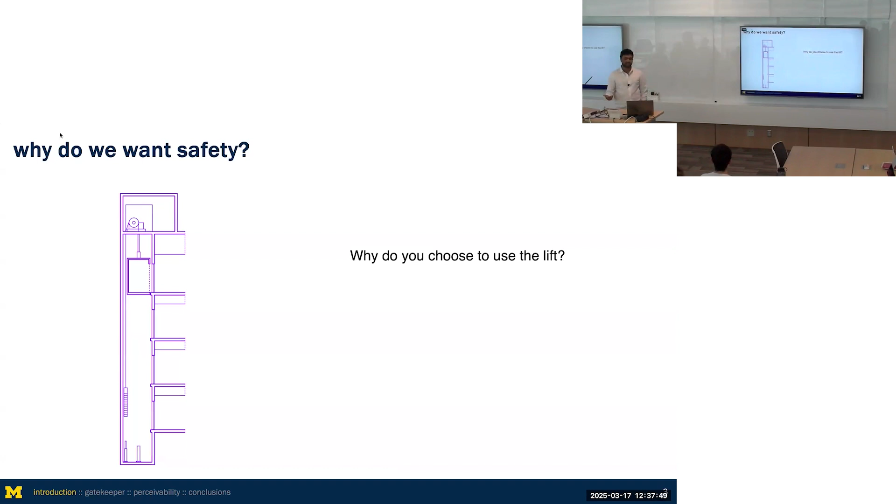But once the lift was invented in its modern form, people started moving up, away from the roads, away from the pollution. And this really was an enabling factor around the 1850s. What happened? Elisha Otis, which you might recognize from Otis elevators, was the one who first created the safety mechanism for an elevator.

He basically created a leaf spring that was mounted inside the lift, where if the main cable snapped, the leaf spring would expand and grab onto the side walls of the shaft and make sure you only fall a couple feet and not actually fall all the way down to the bottom of the shaft.

And so he demonstrated this by very famously being at the World's Fair in New York, where he got on his elevator, he cut off the rope to his own lift, and he stopped. And I think that captured people's imagination.

And I think what really inspires me about this story is he sort of built the safety mechanism into the product. The safety mechanism was built into it to the point where people could start to use it and really appreciate how to be able to trust someone and trust Elisha Otis, I guess, on being able to use the lift. The question is, how does this extend to modern autonomy systems?

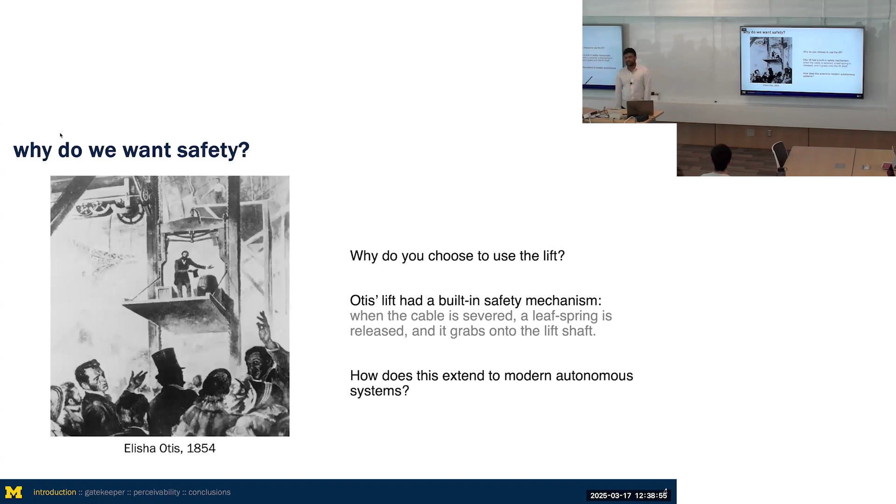In modern autonomy systems, we can't just do mechanical things. We can't just build a parachute into the side of the helicopter and prevent it from falling or crashing. You need to be a little bit smarter about this. And so that's what motivates a lot of my research. What are the safety guarantees that we really want? I'm going to motivate this through two really simple examples.

The first is subterranean navigation. You have this drone that's operating in a dark, dusty environment. It's trying to go through many obstacles. How do you get it to go from point A to point B without crashing into things? Even if it's teleoperated, there's delay and there's lag in how you communicate with the robot. You want some level of autonomy or safety critical aspects built into the robot.

The second example is called a Firewatch mission, and I'm going to keep coming back to this one. It's a really common firefighting mission. Essentially, the problem is that firefighters don't know where the fire is in a wildfire firefighting scenario. You can get satellite imagery at some update rate. It's usually not very high resolution, and it's usually not real time enough.

So what they do is they tell a helicopter pilot, go fly along the perimeter of the fire, as close to the fire as you can go, and we'll use the GPS trace to be able to figure out where the fire is. And then the firefighters figure out where they want to allocate resources. So the question is, how do we design an algorithm to replace the human in this case? Perhaps if you wanted to be able to fly this without sending the human literally into the line of fire.

So what kind of guarantees do we want? Ultimately, we want to ensure safety. In the first example, that's like obstacle avoidance. In the second example, that's making sure the helicopter doesn't enter the fire. And you have other standard constraints. You want to respect the dynamics of your vehicle. You want to respect input constraints.

You also want to make sure you finish the mission. It's a very easy way to stay safe: just stay at home, don't go anywhere, don't do anything. But that's not the kind of safety that we want. And you also want to be robust to disturbances and uncertainties. These are going to be a core part of any robotic system that you implement. We need to understand how these factor into your system.

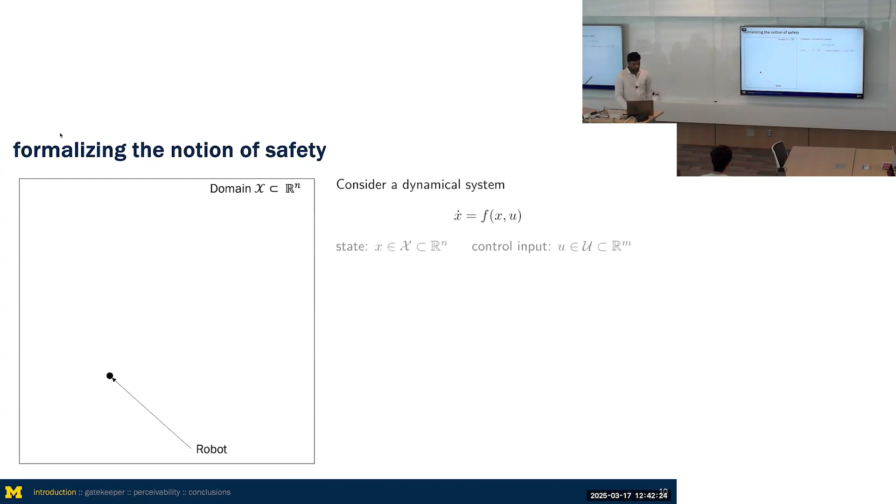Let's talk a little bit about what these safety requirements usually look like. Formalizing the notion of safety a little bit, I think about it as a dynamical system, x dot equals f of x, u, where x is your state and u is your control input. And you have a robot that operates in some sort of environment. The environment has some constraints. And so when I say safety, I really mean a set constraint problem.

You're trying to guarantee some constraints are satisfied. Things like avoid the wall, stay out of the fire. These all form a safe set S. So S throughout this presentation is going to denote the set of states that you're allowed to be in at any given time. And so the goal is to ensure that you stay inside this set S.

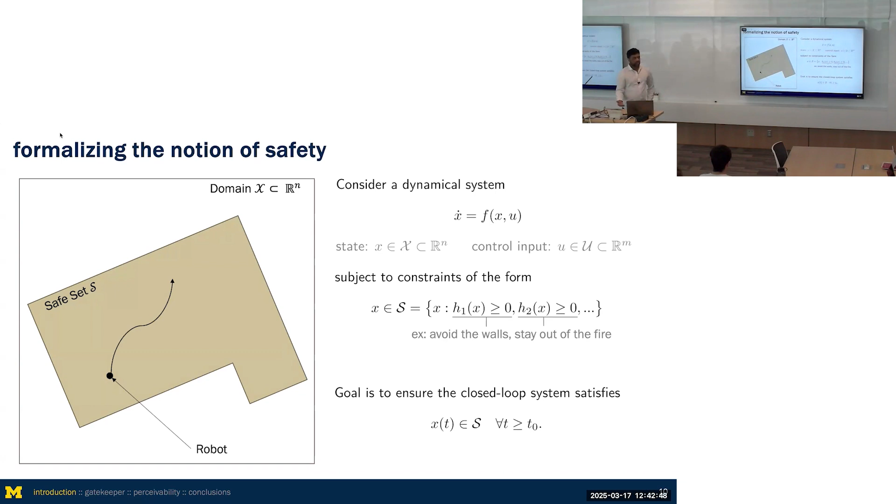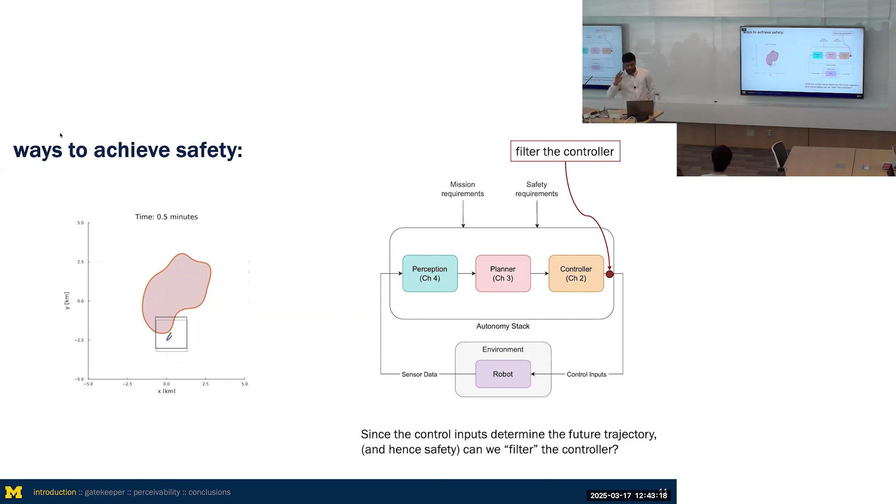How do people normally achieve this safety? I think it comes down to a few different ideas, but one that has really taken hold of the research community in the last 10 years in particular has been to think about it as something that you apply at the very end of your autonomy stack. If the only thing that determines the robot's trajectory into the future is your control inputs, what if we just filtered the control inputs at the very end and made sure we never sent bad control inputs to the robot? So that essentially is the idea of safety filtering the controller. A lot of you probably recognize that this is the idea of control barrier functions.

Control barrier functions were introduced by Professor Ames, where he considers this control affine dynamical system. And he says, well, we have a whole lot of constraints, but let's say we can find a function h. This function h is kind of like a magic function: it takes in your state and returns a single number. If it's positive, we consider it safe. If it's negative, we consider it unsafe. And so it defines the set C that's a subset of your safe set.

And what Ames says is, if h is a CBF, and I won't go into the technical definitions here, then he can define a controller, which we call pi CBF, that ensures that if you started within C, you'd be able to stay inside C forever in time. And so if you can guarantee that h is a CBF, then you have all of these nice properties where you can guarantee safety.

We've worked a lot in our lab on control barrier functions, and a lot of people around the world have also worked on these. But the fundamental problem seems to be that finding a CBF is hard. It's computationally difficult if you want to try numerical methods. It's analytically often quite difficult because your robot dynamics are not so easy to work with. And so it becomes difficult to find a CBF.

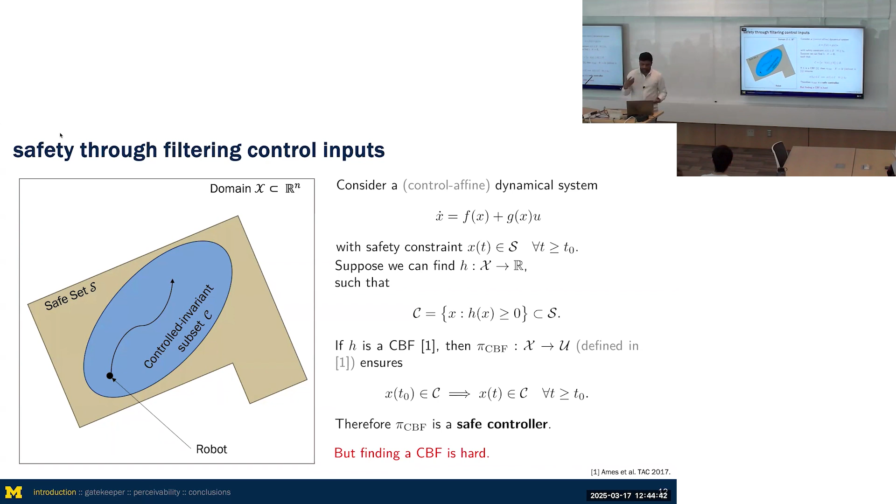The benefit, of course, is that you can handle nonlinear systems as long as they're control affine. And so while you do get the benefit of the nonlinearity and the handling of these constraints, you still need to find a CBF. So that was sort of the first idea, filter the control inputs.

Since the dawn of robotics, perhaps, the way that people have started to think about this is, can we constrain the planner? We want to maintain constraints. What if we put these constraints into the planner itself and made sure trajectories were safe? And so what does this look like? There are many, many methods for doing this. I'm going to highlight two broad classes of them.

The first is path planning methods, where you use simplified dynamic models, usually kinematic models or single integrator, double integrator type models, and you plan trajectories that respect all your constraints. Obstacle avoidance and dynamic obstacles can be handled, and sometimes Dubins vehicle type systems can be handled.

And so you can handle a lot of complex and sometimes dynamic environments. But the problem is that you've got the difference in the model. You've got a model that you use for the planning, and you've got a model that your actual robot is. And in between, there's a controller that somehow should handle all of the mismatch.

Some people have studied this problem, but it's usually quite tricky to take the trajectories that are planned by a path planner and actually put them on your robot as a control input. We did some work on this, trying to see how you can merge that gap a little bit, but it means that you need a lot of assumptions on exactly how these components are built together.

Another common approach is model predictive control and all of its variants. Essentially here, you use the full nonlinear dynamics, or in some cases a simplified model again, and you plan a short horizon into the future. By planning a short horizon into the future, you can really think about what the robot's going to do over the coming horizon, and you can choose to act on the first little part of it and then replan at the next time step.

This is really nice because you can really think about all your constraints, and you can enforce your constraints in your path planners explicitly. But one of the main challenges on a theoretical level is guaranteeing recursive feasibility and stability. These are two really important concepts that I did not appreciate until we ran our controller.

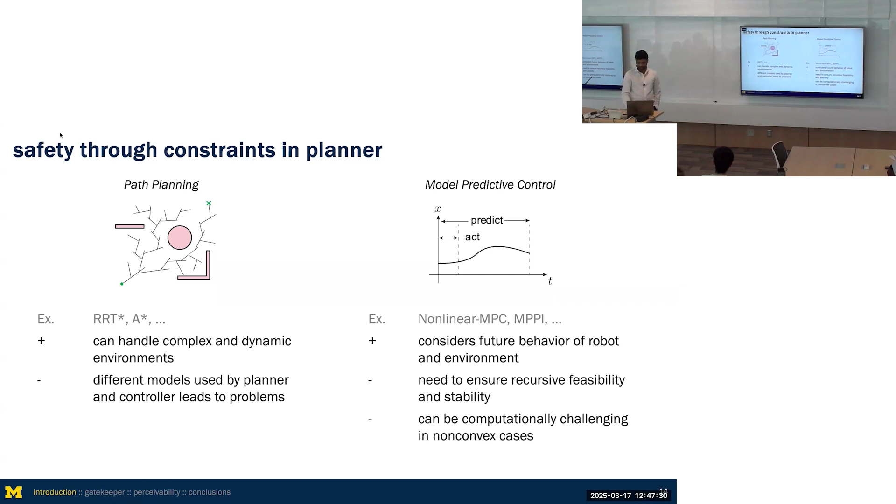The other challenge with model predictive control is that it can sometimes be computationally challenging, especially if you have a non-convex problem, especially if you have dynamic environments. It can be really difficult to guarantee that your controllers solve within a fixed amount of time that's necessary to run this in real time. So these were broadly the two types of methods that people have tried for guaranteeing safety.

And what we're going to try and do is, I was thinking about the firefighting mission, and I heard about this from an actual helicopter pilot who flies this mission. How do humans achieve this? There's some way that humans achieve this. And as I was talking to him, the main thing that he kept thinking about was contingencies, fail-safes, and backups. Essentially, as you're flying through the mission, can you recover safely? Can I go back to the landing pad? Can I do something to escape anything bad that's going to be happening?

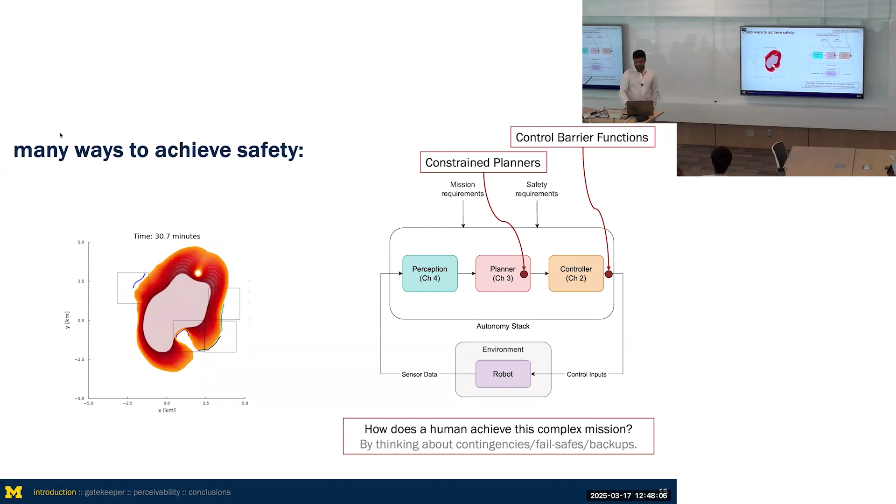So the main perspective shift is, instead of trying to design a controller and a control invariant set and check all your conditions over all of C, what if we just checked that there was a safe trajectory going into the future? You just need to check that there exists a way for you to be safe into the future. And this is the main idea that Gatekeeper tries to build on. Also, we want to do this without compromising on mission objectives.

So now I'm going to try and describe to you a little bit about how Gatekeeper works. The core idea is that you have some sort of safe set that you don't really know a priori because it's unknown. And you have a perceived safe set, which is the set of states that you can see with your robot at the current time. That's going to be denoted by B0. All of this can be time varying, but on the graphics, it's more or less going to be static just to make it easier to understand.

And this committed trajectory, I'm going to guarantee it's safe by construction, and that's the only thing the controller will ever see. So the controller only ever sees safe trajectories to follow. How does this work? At the kth iteration, we're going to construct a candidate trajectory using the path planner's nominal trajectory. We're going to check if the candidate is valid. If it is, we're going to commit it. And the controller is always going to track the last committed trajectory.

Now, you want to be able to guarantee this for all time into the future, right? You want it for all t greater than tk. Of course, we can't plan infinite horizons. We can't compute infinite horizons. So what I'm going to do is split it into a finite horizon and an infinite horizon. The first half is between tk to tkb, and the second half is tkb onwards. And a way to guarantee this is you check that the first half lies within your perceived safe set, and your second half enters something called the controlled invariant set.

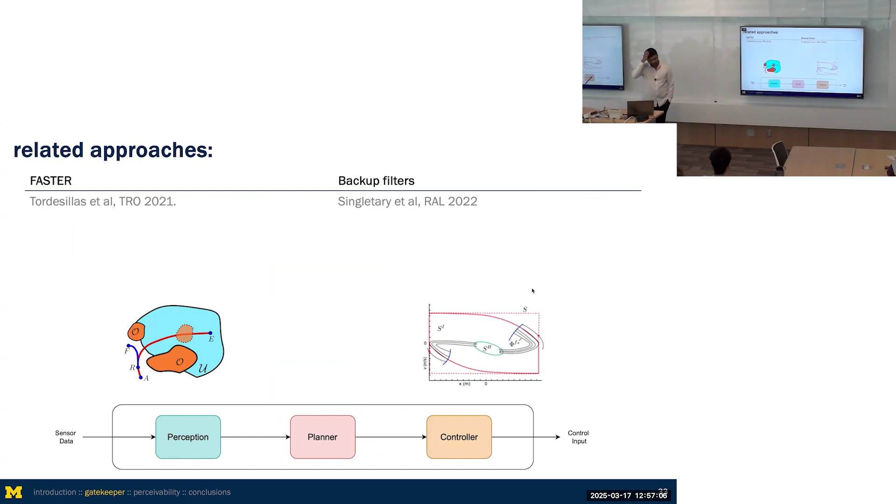Essentially what he does is he uses MPC to simultaneously plan for both the nominal trajectory and the backup trajectory. So here he has a robot that starts at A, it's trying to get to E, but this blue region is unknown. We don't actually know what the safety is there. And so what it does is it plans both the red trajectory and the blue trajectory simultaneously.

One of the challenges is that because he's using MPC, because he wanted formal guarantees, he assumed linear dynamics, he assumed convex safe sets, or at least unions of convex safe sets, and it was necessary to be able to guarantee the recursive feasibility.

Another really cool idea comes from Andrew Singletary from Professor Ames' group. This is much closer to the idea of filtering at the controller level. Essentially what he does is he forward propagates just the backup controller along a trajectory, looks at how close that backup gets to the unsafe set, and if it's getting close to becoming unsafe, he switches his controller towards using the backup.

He has this mixing controller where he mixes the nominal controller and the backup controller. And in that way, he's able to create a continuous time guarantee of safety, where Gatekeeper does it in discrete increments. The whole idea of the safety and backup filters is in continuous time. It's a really cool idea, and it works pretty well for a lot of scenarios.

But one of its main limitations is that it only checks the safety of the backup trajectory, right? If your nominal was a safe thing to do, but your backup is one that's about to collide, why do we switch to the backup? We should keep trying to use the nominal. And that was one thing that motivated the construction of Gatekeeper.

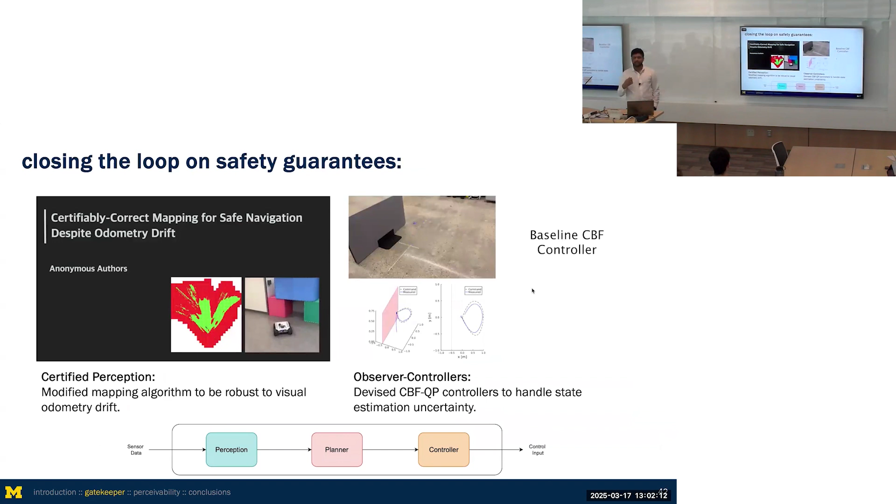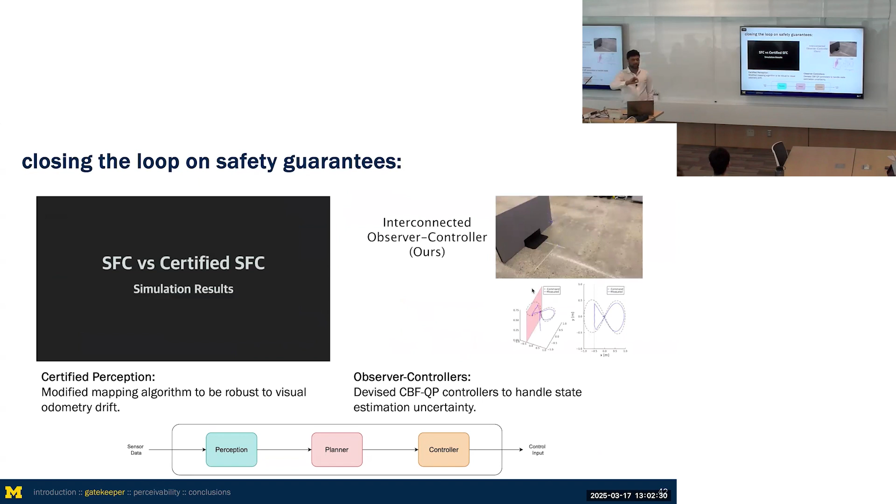Also, one of the main things that I've assumed is that you have a perceived safe set. And for the purposes of the experiment that you just saw, I assumed the perceived safe set was sort of perfect. But no perception system is going to be perfect. And so one of the things that I've been really interested in is how do we integrate the perception part with the planner and the controller such that these guarantees hold across your entire autonomy stack, right? If your perception system is not working correctly, it wouldn't be able to guarantee safety.

And so the first piece of work over here is on what I'm calling certified perception. Essentially, you've got visual odometry drift when you're doing state estimation. That means your maps are kind of corrupted, and therefore you won't be able to guarantee safety. And so how do we modify the mapping algorithms that exist so that we can guarantee safety in the sense of any trajectory that is executed will actually lie within the safe set?

And so the idea that we proposed was, instead of constructing safe sets that are just unions of all the free space that you've seen so far, you can also deflate those regions based on how much visual odometry error you've accumulated. And here we've really used a lot of the Lie algebras and Lie group theory to be able to understand how much error is accumulated per step, and how do we create safe maps in the body fixed frame.

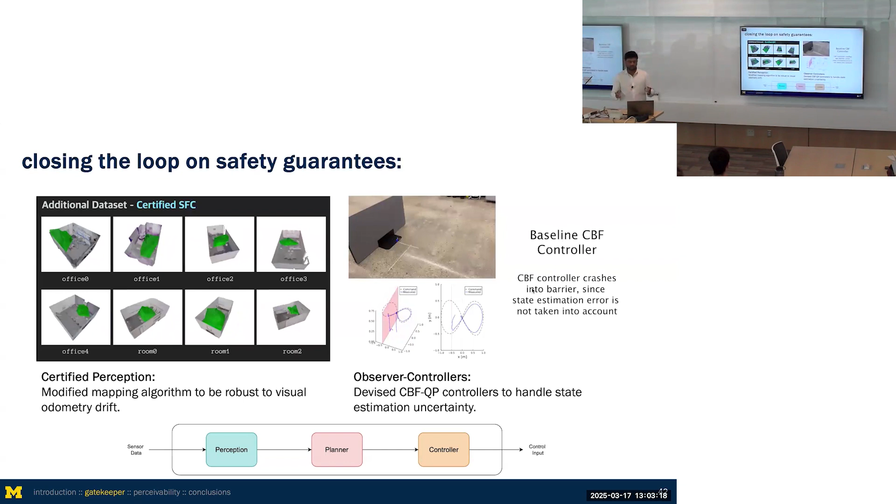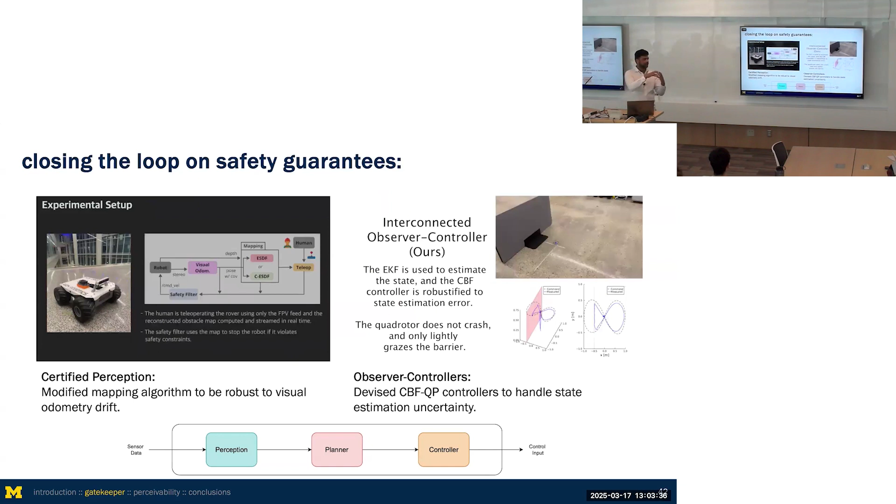The second work, which I think the video is playing, is this idea on observer controllers. So again, you've got state estimation error, especially from like a Kalman filter or any sort of EKF. That state estimation error means you don't really know what the state of the robot is. It lies within some sort of ellipsoid, but you don't really know what the state is. So how do you guarantee controllers working well in that state? And so this work was really trying to understand how do we correct our controllers under this state estimation uncertainty.

All right, so that sort of wraps up a lot of the safety considerations that I've been talking about. We're really interested in how these safety guarantees propagate throughout the entire system and not just either the controller or the planner. And I think you really need to think about all of these components together when you're designing controllers to be able to guarantee safety.

I'm going to switch gears now towards talking about information and what are the limits of information gathering capabilities of robots. So here the scenario is, sort of, I mean, the Mars helicopter didn't really do any sort of exploration, but here are the two main motivating examples for this line of work.

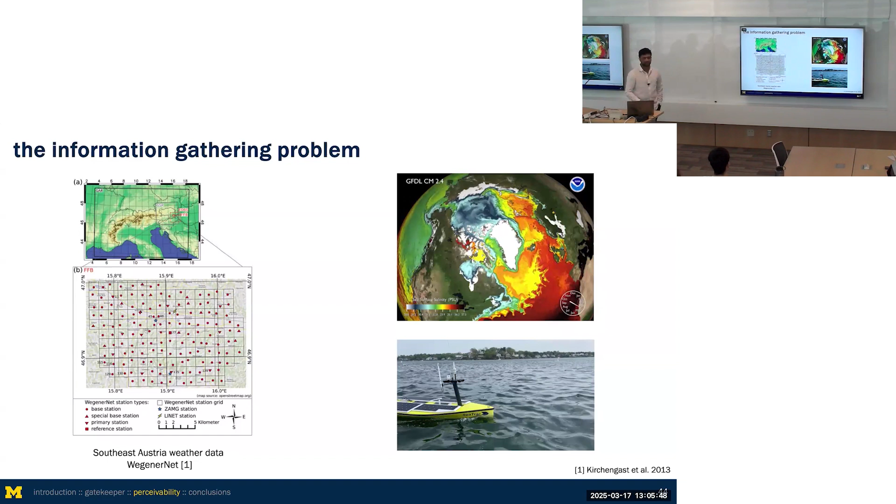So the problem, in words, is we have a team of robots exploring this environment, and they're trying to collect information, right? How do we control these robots to do this efficiently? And when we started to think about this problem, we ran into a lot of problems very, very quickly. The first is, what does efficiently mean? We need a metric for efficiency here. And then we were like, but what does information mean? And then we struggled to try and define how do we talk about the quality of information that we're collecting.

And then we struggled even more because we were wondering, can the robots even collect this information? The information is changing in space and time. You've got the entire world that you want to try and map, but you only have 3 robots. Is it even possible for these robots to go out there and collect the information that you want? And so that led us to what are the fundamental limits of information gathering.

And so I tried to simplify the problem, tried to remove all of the complexity of mountains and wind. And I thought about a single robot that has some sensing range, and we care about a single point P. The single point P might have some information associated with it. For instance, the wind speed, the temperature, whatever you want. It's some sort of vector. I'm going to denote that vector with M. So our goal is to use the robot X to be able to estimate M, right?

And the simplest model I could think of was we have some sort of dynamical system for our robot. Here it's still nonlinear. And we've got a very, very simple model for the M. It's changing in time, so we said M dot equals some noise vector W. We had a linear sensing model. Notice how the sensor measurements Y are C of X times M, so it's linear in M, and there's some noise V added to it.

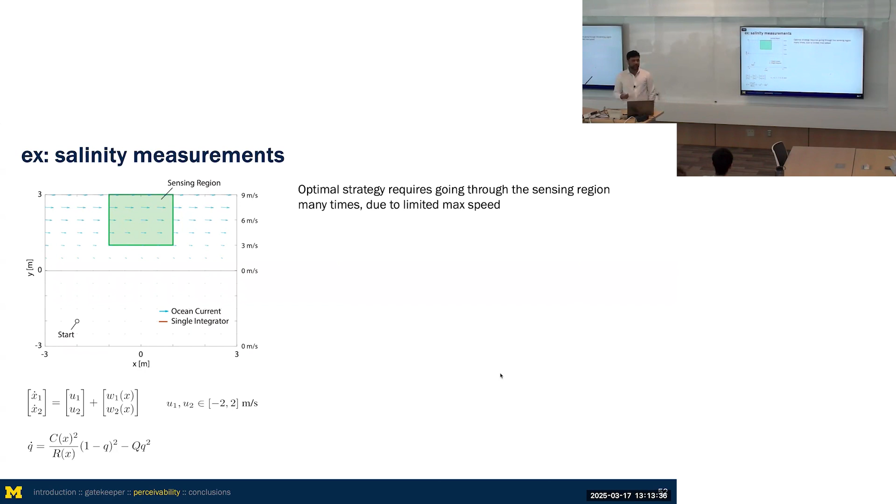You can actually run the controller, and what you'll see is this robot starts out over here, moves up, and it has to do these like circles of this environment. The region over here where it's sensing has too much of a current to be able to stay inside that region and collect measurements indefinitely. So the robot figures out that it has to go around and do loops, go to places with lower current, and then be able to come back and make measurements.

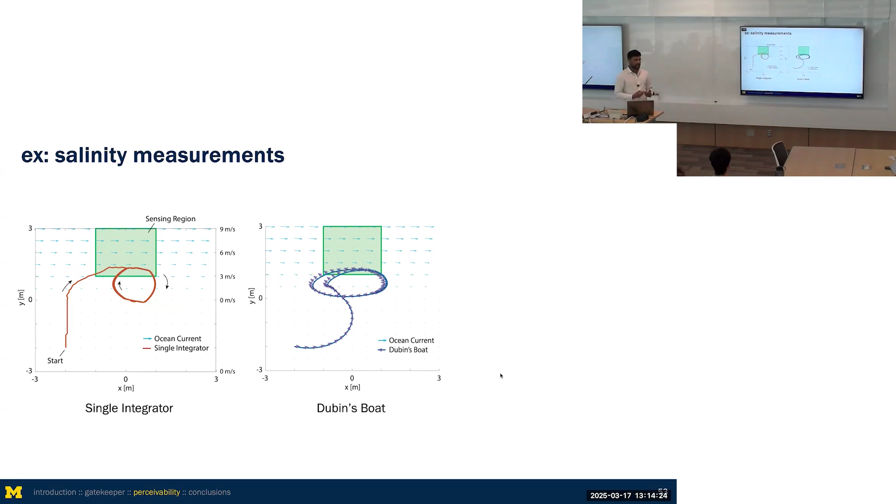If we now change the robot's actuation model to like a Dubins boat, so you're controlling the heading and the speed, and you have the exact same sensing model, you arrive at a slightly different trajectory for the system. So here you can see really clearly that based on the robot's dynamics, you might need to do different controllers and different trajectories to be able to collect information optimally.

And you can also plot the clarity against time. And what you'll see is that for the single integrator, you can collect information more quickly. The clarity increases faster than that for the Dubins boat. And so under different actuation models, you can have different levels of perceivability.

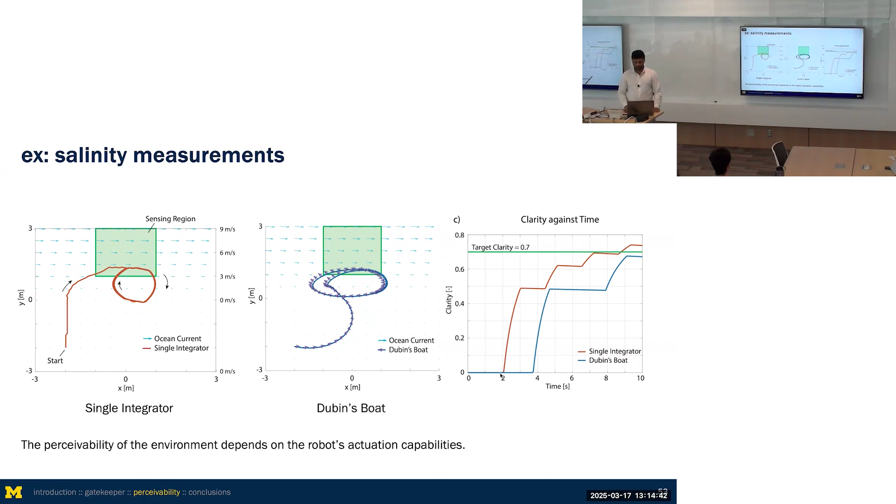I'm going to go back to the dynamic coverage case. So in the perceivability, we were really talking about a single point. What is the best way to collect information about a single quantity that's in your domain somewhere? But for dynamic coverage, we want to cover the entire domain and make measurements across the entire space. So here I'm going to start to talk about how we address that. And this was my CDC 2024 work.

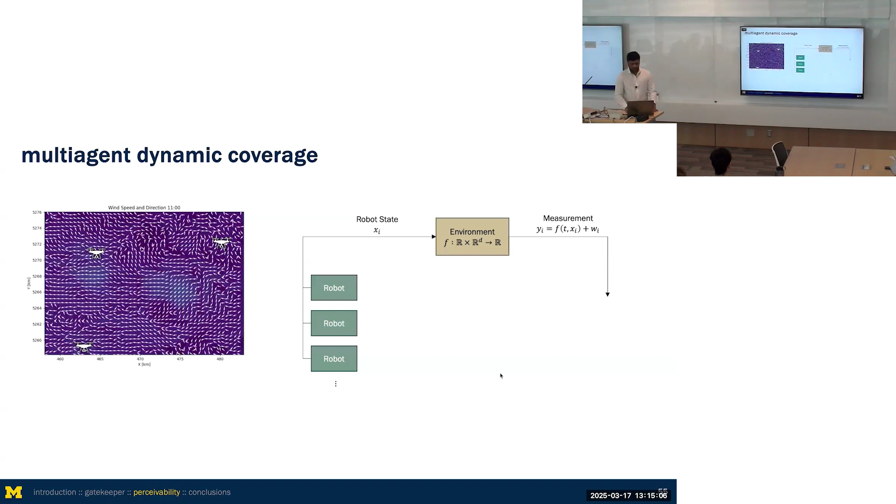Essentially, we've got a team of robots over here that are exploring the environment. And as they make an interaction with the environment, they're producing measurements of, in this case, what wind speed is at any given location. The idea is to model the information, like the wind field over the entire domain, as a Gaussian process. What we need is some way to be able to estimate, if I make a measurement here, how does it affect the information somewhere else? And so some amount of continuity or some level of correlation is needed. We assume the world was represented as some Gaussian process.

Gaussian processes have some computational challenges, but a really nice property is that they have this equivalence with stochastic differential equations. And this is well understood, even if it's not super widely known; there's some really nice algebra to convert a Gaussian process into a stochastic differential equation. And as it happens, for certain classes of Gaussian processes, you end up with a linear stochastic differential equation, and back come Kalman filters.

So now that you have the stochastic differential equation, we can estimate the information over the entire domain using what we're calling a spatiotemporal Gaussian process Kalman filter. That part is not my own work. We've extended it a little bit, but essentially it comes out of other research groups in this field.

What the STGPKF gives you is two things. First, it gives you the environment estimate map. So it lets you estimate what the wind speed is over the entire domain. And it also gives you a clarity map. It tells you how uncertain you are about the wind speed at any given point. And you can use this now to be able to design controllers.

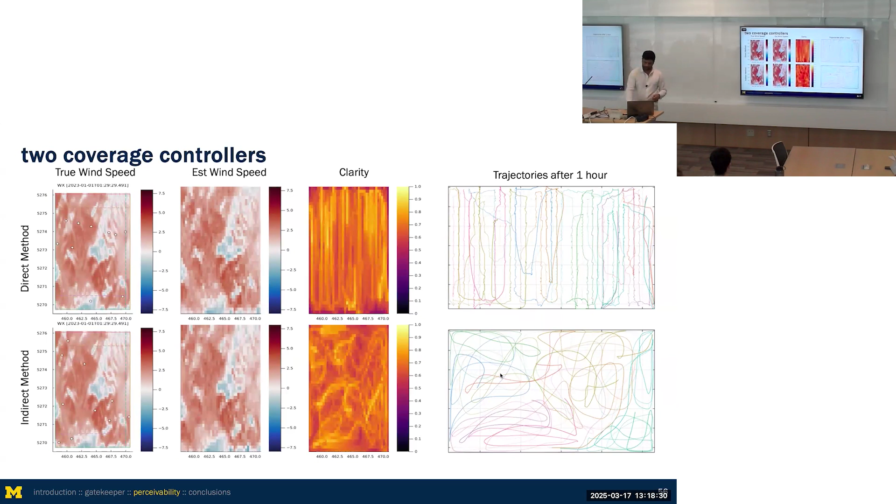Caleb's also trying to extend this method towards handling non-stationarity. So right now we've assumed the length scales and the time scales over your entire domain are constant, but some regions might have higher rates of change. So for instance, if you're in a lake right around a corner, maybe the wind speed changes a lot more than out in the middle of the ocean where the wind speeds are roughly constant in time. And so if that's the case, then perhaps you want to spend more time near the shore where the wind is changing rapidly rather than out in the ocean. So he's trying to see if we can extend the coverage controllers to be able to do that.

All right, I'm gonna start to try and wrap things up. There were two main questions that we were trying to address. First is about these safety considerations, and the second is about the information gathering abilities. And like I mentioned at the very beginning, these two are kind of linked. If you can collect information about the world, you might be able to do things that are more aggressive while still being safe. And that's definitely a direction that we're starting to look into a little bit more.